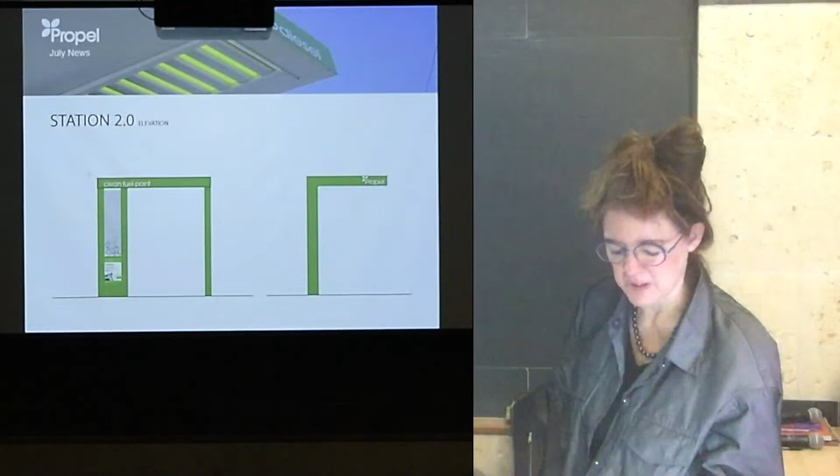Oh, design, clients, economics - so many of these journeys are about this piece. So while we won a big, nice award for that project, we did not get it built.

The next project, though, we did get from that project, and it was the Biodiesel Station, only it was funded now by Global Capital. We thought we had it made. Great, so we built this very elegant little element. We rebranded the whole Biodiesel Station for Propel.

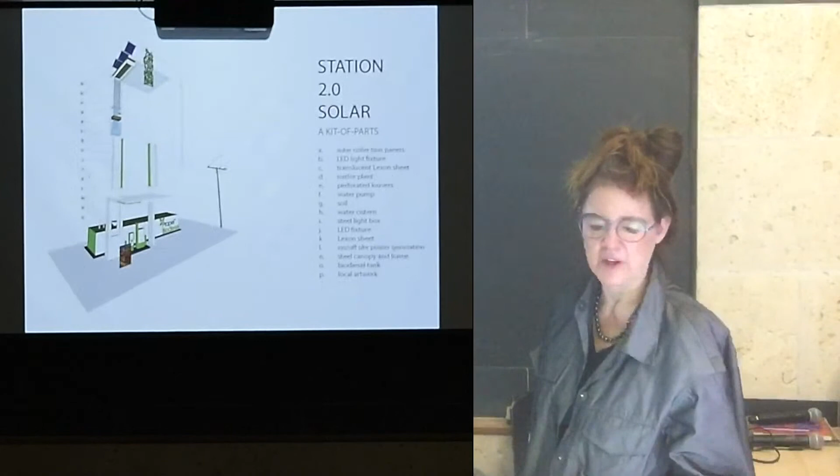This is July of 2007. We get this wonderful kit of parts. We have these biodiesel stations in the Pacific Northwest where we have water to deal with, and we have biodiesel stations in places like Austin, Sacramento, and Southern California that have solar to deal with.

We're still collecting the water. We've got all the pieces, and yes, a few of them got built. One got built in South Lake Union. We're creating the little landscape of sunflowers, because that's where the oil came from. That's where it's been upgraded with a little water filter in there. A lovely little water louver mock-up.

Fabulous little piece. It's now destroyed because of Global Capital as well, because South Lake Union is all taken up. But our plan was to roll these out with some kind of royalty system, down through Sacramento, all the way up and down the coast of California, Oregon, and Washington.

Again, the royalties got shifted. We didn't sign our contracts correctly. They went down to Sacramento, and another architect took them over, changed the whole branding concept, and we built this one. We were very happy about it, and yes, we won another award for it, but it stayed as a one-off, a single prototype that didn't have the power or impact we thought.

And then biodiesel's profile changed in the sustainability environmental movement anyway, and we were kind of happy we hadn't built 200 of them in the end.

The third waste to energy project, though, we said, let's take this into our own hands. So my husband and I, who's not an architect, bought this piece of land as an auction item from WashDOT, the Washington Department of Transportation. They were building this huge, lovely tunnel over to the tech companies on the east side of Seattle. And this little tiny site, 3,000 square feet, just a leftover thing, a pittance, and we were waiting to work on it. So first we thought, well, let's do something with food in the right-of-way. There's a Thurgood Marshall Elementary School right across the street that has hundreds and hundreds of elementary school kids, one of the biggest free lunch zones, elementary schools in the city. My daughter was going there.

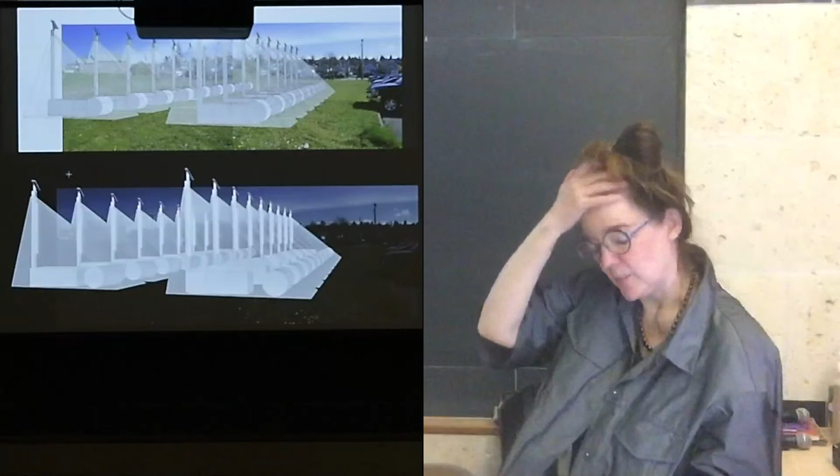Right below my daughter's foot, 6 inches below, is asphalt. So we said, hey, we can't put these greenhouses on there, so we have to build something that's above ground. So we built this little tiny, super low cost, $500 now, not $15,000, $500 per piece, all found little tiny water sheds and soil bags and a little bit of a solar operated temperature sensing and pump for the water to come in. And we had this great plan.

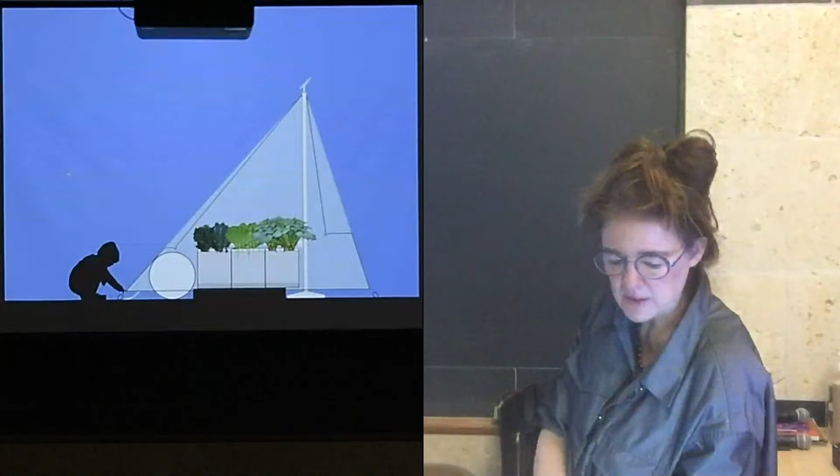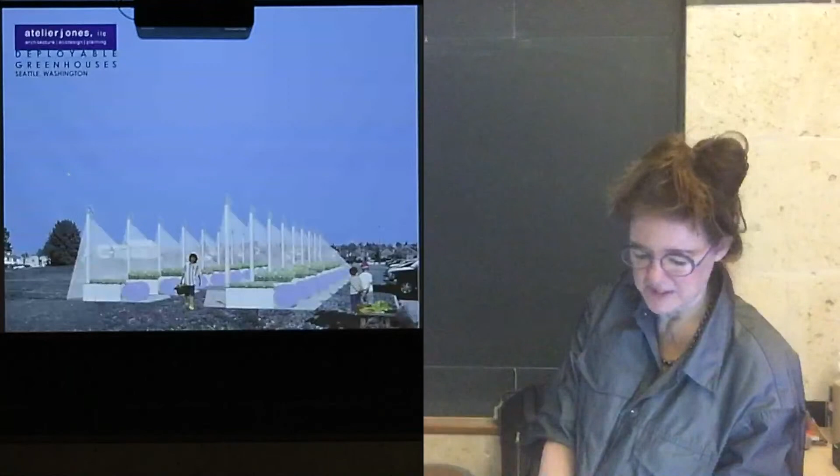We pitched it to the school. We pitched it to a Kickstarter site, and we raised $990. And 500 of that was from my mother, which was very nice of her. But the plan stayed as an idea, and the plan won a nice design award, but it stayed on the shelf, and the land still stayed the way it was.

The next zone, though, we went to Starbucks. Starbucks came to us. We don't quite know how. They said, listen, we've got this parking garage. This is the roof of the parking garage, and it's right under Howard Schultz's office. That's the city of Seattle in the background, looks over the water. It's an acre. It's an entire acre. It's been sitting there. It's a wasted site, 43,000 square feet. Let's build something here that can be fabulous for people who work for Howard.

So we went to the Office of Sustainability and Environment. We said, hey, listen, you're looking for a green roof initiative, a demonstration site. Boy, do we have a demonstration site, run by Starbucks, headquarters, on the top of this roof. It's an acre. We can hold stormwater, capture that stormwater, reduce the water runoff, which we have great issues with in Seattle, and then create a green roof for people to use.

We talked to the city of Seattle. We got all the assembly issues, the code issues massively done, put together this lovely presentation of how the green would be held up at the top, the water would be held in a cistern, come off as a runoff down to a decorative cistern down at the green street below, and the mermaid would be surrounded by green up on the top of this roof.

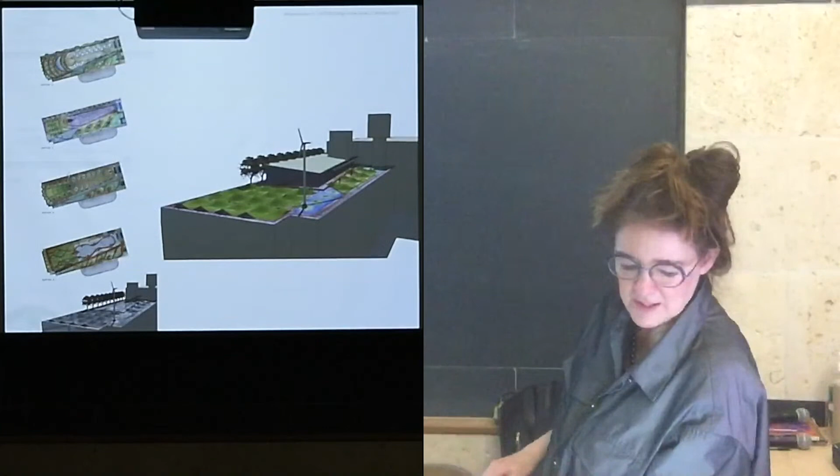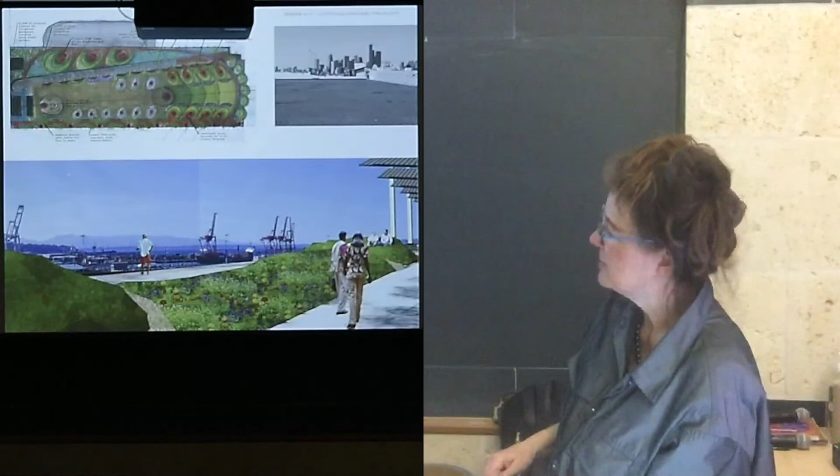Lovely pastel drawings. We were going to have Howard out there. He had his speaking spot. We were going to have solar, potentially a building up there, a lot of wind to have this all be powered, and places for people, for the 3,000 employees at Starbucks headquarters who were working at the building at the time, from waste to energy, looking out over the bay.

Built these beautiful models, and then guess what? We got it priced. This scheme was $6.5 million. Seems like a pretty good deal if you're Howard Schultz. Not. The next scheme down, with just less of the solar, less of the wind, less of the paved structure, was $4.5 million. If we just wanted to do sedums over the entire roof, it was going to be $1.5 million. Howard said no, to all three of them.

He had his investors in New York. He was concerned about them. They didn't want having some frivolous Seattle thing, a green roof on top of a parking garage. Didn't look good for the New York investors. So that project went into the drawer as well.

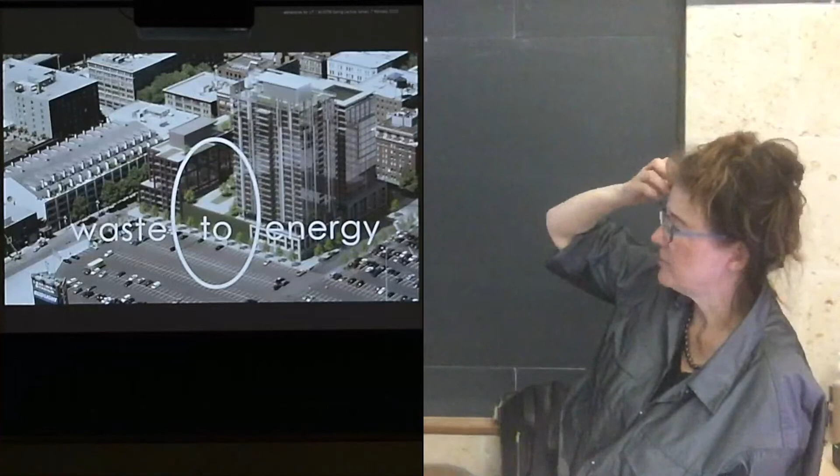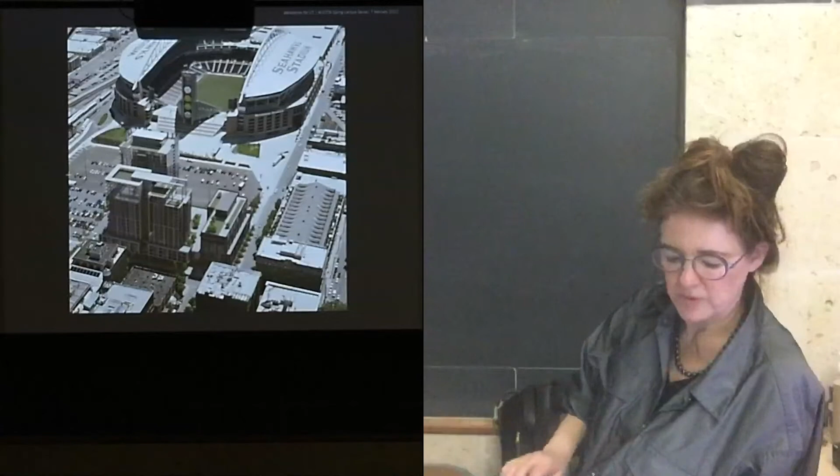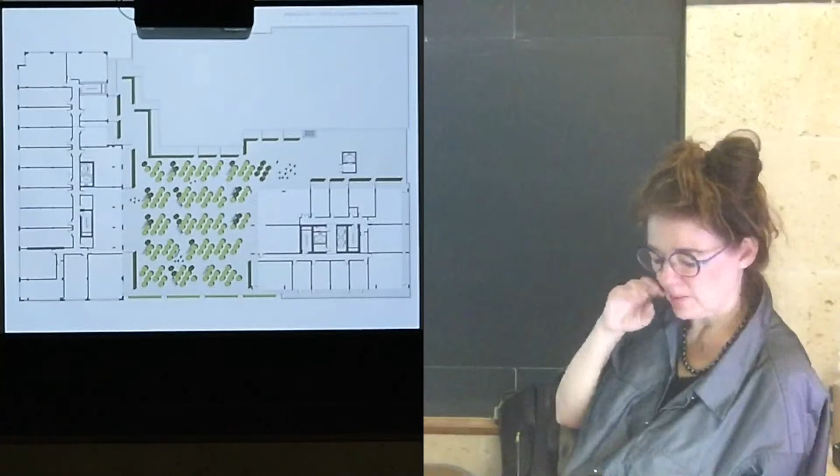The next project we looked at was a series of greenhouses for a friend of mine who had been a great partner from Daniel's development, Kevin Daniels, a very good friend of mine. He was building these high-rises on a parking lot, a wasted site, across from the Seahawks Stadium, which was a fabulous project for the entire city. He had been granted an agreement with the city of Seattle to build these high-rises plus the block next door, and he had this little tiny space on top of the podium, on top of the parking garage, ready and waiting for green. So we came to him and said, you want to put in a restaurant, a high-end organics restaurant on the lower floor, and we want to put in greenhouses to grow that food on top.

Of course, we had to worry about sun shading for all of the high-rises. It was facing south, well positioned there. We worked with landscape architects and planting people to come up with a planting plan that would work for agricultural food on top of this parking garage for different seasons, in the winter, summer, fall, all through the menus for the restaurant all year.

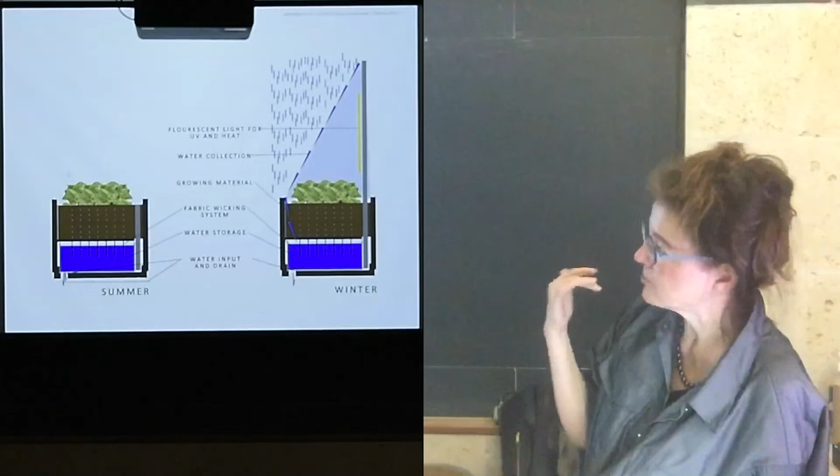Little tiny details regarding the beauty of these spaces, capturing the water, capturing the light, heating it with the light source on the interior, growing the food, and then detailing it all out, and again, getting it priced out. And guess what? You already know the answer.

Kevin said no, cost too much, can't do it. Then he said, but no problem, because I've got this wall that I have to do, and I've been given $1 million by the county to develop this wall, this vertical wall this time, on the same side of this site.

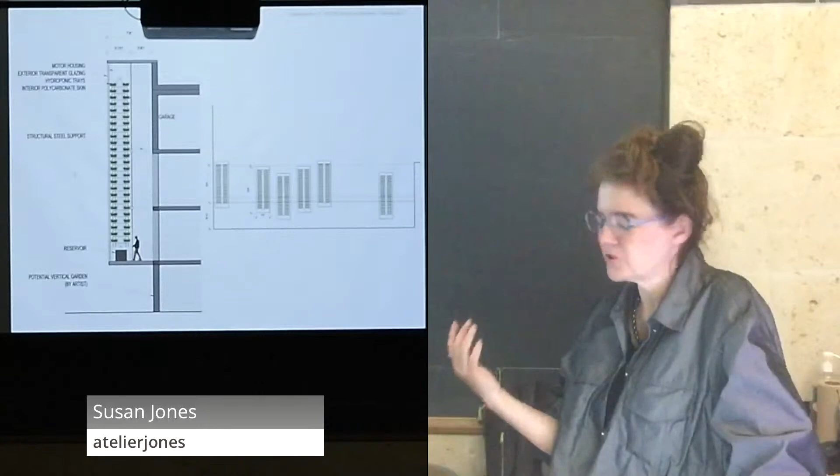Awesome, Kevin, can't wait. So this time I taught a studio at the University of Washington on greenhouses, on hydroponic greenhouses. This is in 2010. We learned about all the different elements of the hydroponic trays and the ebb and flow system, this lovely system called the VertiCrop, which is like a dry cleaning rack, where you can move all of the plants around, and they get equal access to light, using much less nutrients, much less water.

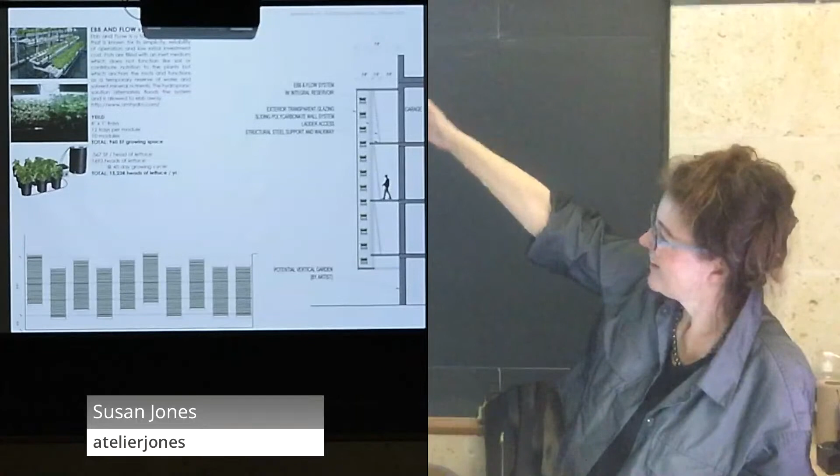And the beauty of it was that all of these systems could go on the outside of the garage, screening the garage from the site, from the Seahawks fans getting out of their game every day, moving up and down. You could use the maintenance as it was going up and down, and it created a very simple, lovely diagram on the exterior of this parking garage.

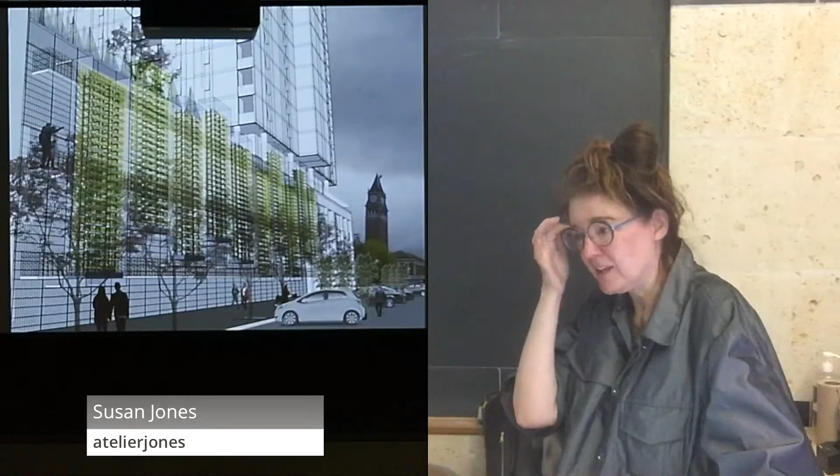Well, I don't have to tell you the answer to this one, but it was not only about cost. It was also about maintenance, because you had to have somebody to manage this thing, and it got more and more complex. These new systems that we were devising were pushing the boundaries of code, pushing the boundaries of risk and cost for our developers and owners, but they were also pushing the boundaries of operations and management. We were pushing more and more of these areas that made it almost impossible to build one of these few things.

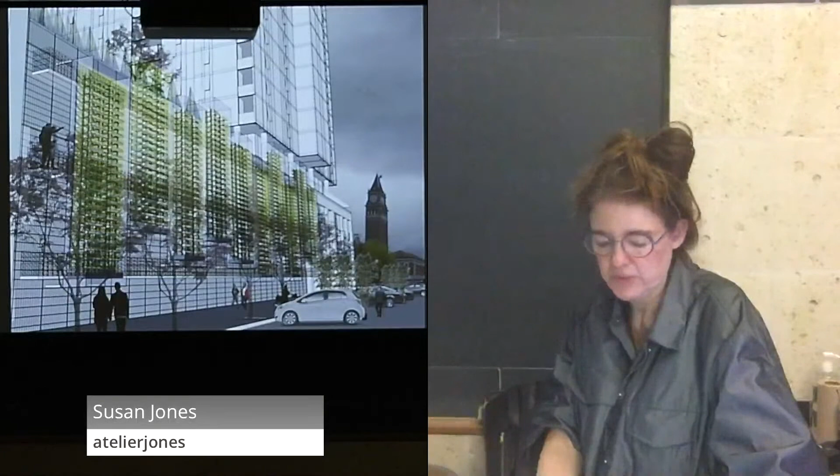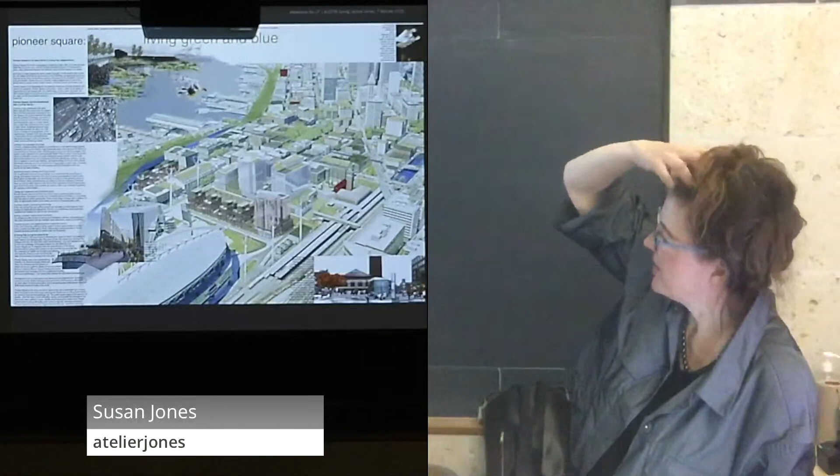We tried one more time, entering a competition for Jason McLennan on the Living Future, to capture all of these ideas. One of our big notions was to green all of Pioneer Square, where that lovely hydroponic greenhouse would have been, to add stormwater retention areas, to clean up the waterfront, to take down the highways, to capture the water in the underground areas under Pioneer Square, to clean it, to use it as energy through microturbines, put in green roofs, etc. In 2011, we won, yes, another lovely award.

A lovely design award. It was around this time, though, that we were beginning to reconsider our strategy. As architects, offering up design because we were offering it out of our passion, while also not being paid for all of those projects, almost all of them anyway, offering up that level of passion was probably a strategy that was not going to be sustaining in the long run.

And at the same time, there were 140 acres coming into my family's management from my grandfather, who had bought it in the 1960s. It had been clear cut, and he'd been growing these trees. There was a sense of discernment that the deeper I go into my own personal resources and use those resources for what they are, whatever those may be, and it's not just financial, it's a collection of family memories, history, legacy that all of us have, every single person in this room has.

The deeper you go into that and use those resources, the more powerful that can become. That level of discernment was a long process, and it didn't happen overnight. I wouldn't even have been able to say that it was happening until now, when I look back 10 years.

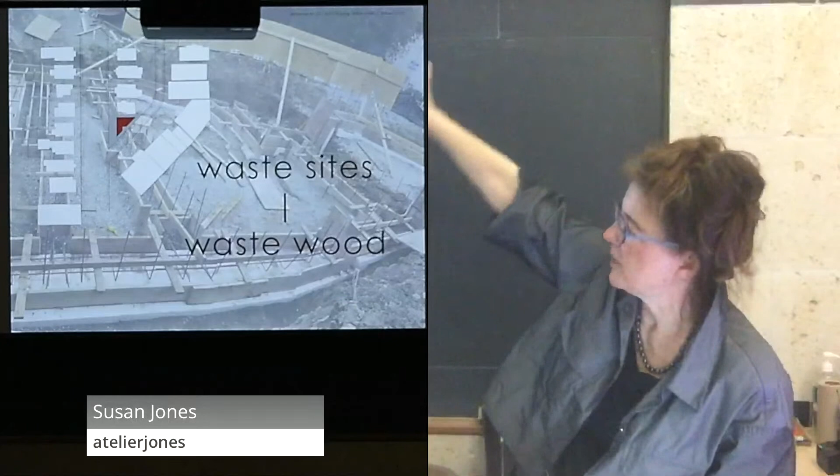We have the opportunity to buy a tiny site that's completely wasted, a triangular site in the middle of Madison Park. It's a leftover site — you can see it there. The diagonality of Madison comes down; it's kind of our Broadway of Seattle. And it's this leftover little triangular site, about 2,000 square feet.

The site itself — we said we can build. My kids have been in this 1,000 square foot condo for 10 years, and they were getting bigger and bigger, and we had no room for them. So we decided to build a house, and we were lucky enough and privileged enough to be able to do that. But the kind of house it was going to be at this point was very different than the kind of house I would have built 2 or 3 years before.

Because at this point, I knew I wanted it to be a demonstration house. I knew I had to put the resources together — professional, personal, and financial. I had to begin to take a huge risk and make a statement with design, and to do something that had not been done. Because all of the other projects I'd been trying to do had also not been done, but everybody was too scared to do them, except for somehow me.

Now, mass timber is not new. Uli's looking at me like, Susan, this is not new, of course. Germany, Austria — it's been around for 30 years. So in a way I felt like I had a free pass, right? Because the technology was tried and true. It just wasn't done in America.

There were about 2 buildings in Canada, both designed by Michael Green at that time, and that was about it. As far as I know, there were maybe 2 or 3 houses in New York that nobody could see because they were very private — there were NDAs associated with them. I didn't even know about them at the time. There was one house I knew had been built with mass timber, built by, I think, the Tennessee State football coach, and it looked like an Italian Renaissance villa. All the mass timber was completely closed up.

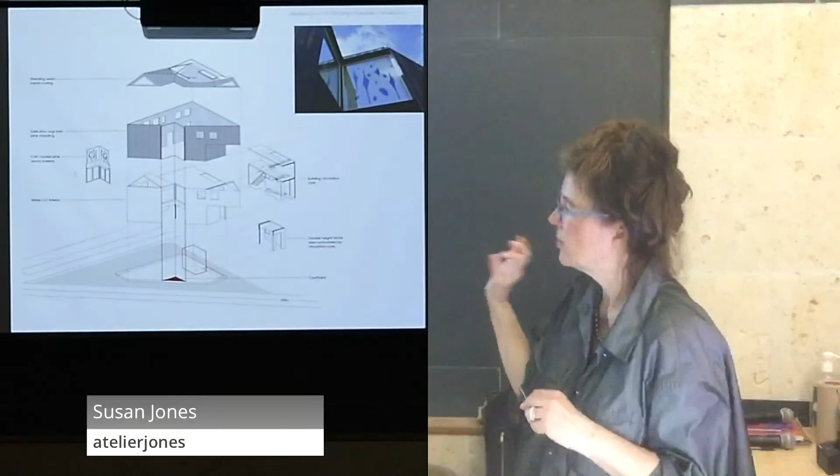We have a black shell of shou sugi ban, the Japanese burned wood, which we got pre-finished from Montana, Douglas fir 1x4s. The blackness surrounds as a hard shell the softness of the interior of the mass timber inside. You only see it a little bit at that one cutout where the courtyard happens, and it's kind of bearing its breast to open the beauty of the wood up there.

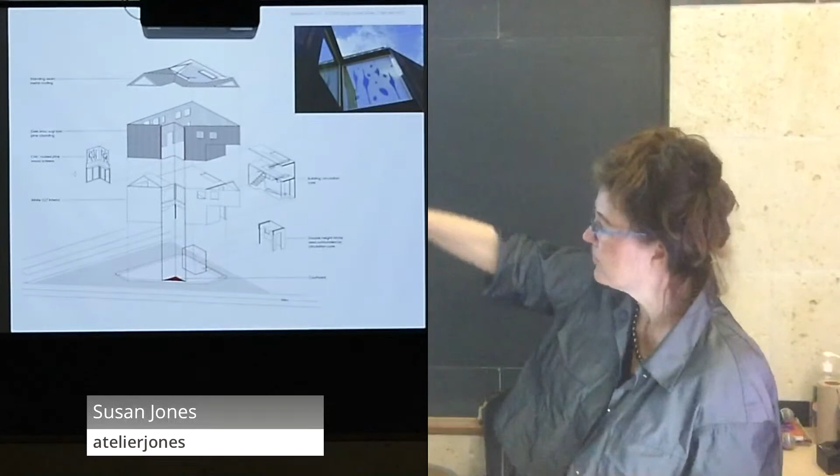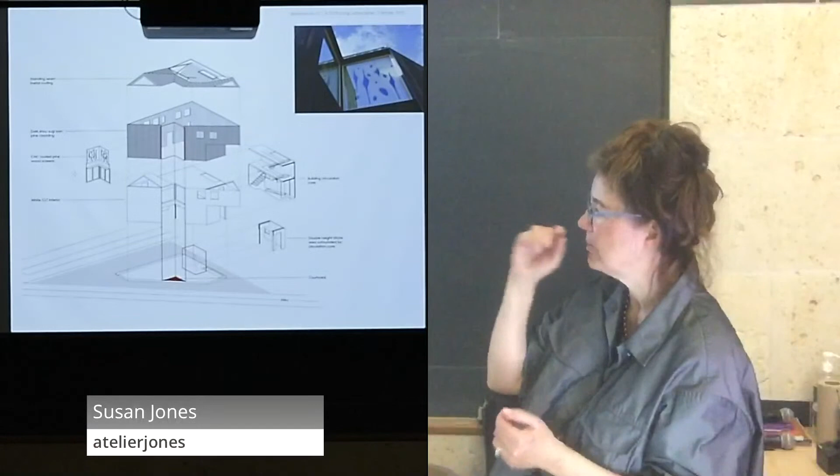We had a lot of fun with the CNC modeling, as you can see there. There's a core in the center of the house that carries almost all of the services, the basement, the HRVs, the ERVs, the heating, and the kitchen and bathroom above, as a vertical shaft with the staircase around it, and there's a roof deck on top, which is a simple standing seam, very vernacular for the area.

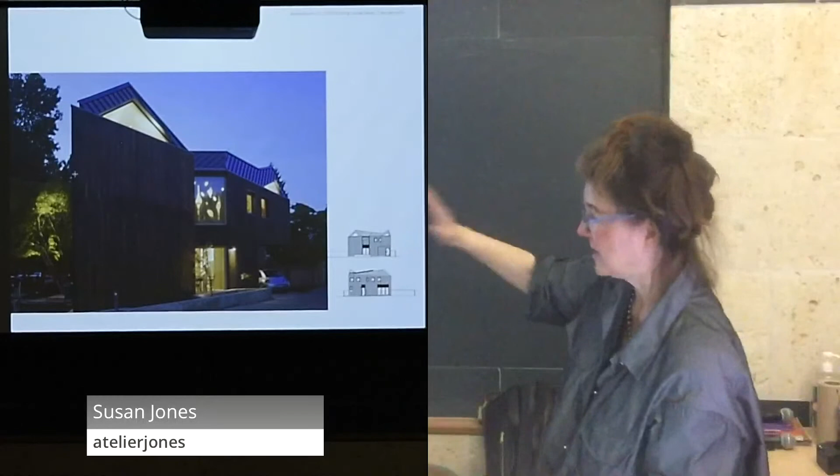This is from the alley. So much of the siting of this house is based on the fact that there's a very thorough, robust, dirty and active alley with garbage trucks going up and down, delivery trucks, semis coming through, and parking lots across the street.

We both wanted to wall that off, as well as open up to the light, because it's also the south and the west. So we kept the horizontal views very screened, and then we added a fence down at the bottom to screen in this little courtyard.

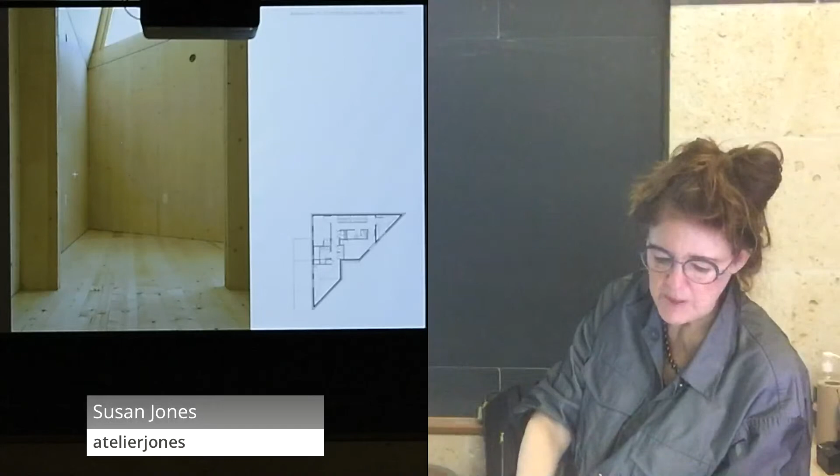On the inside is the pure blonde wood of the spruce, the pine, and the fir that are brought down from Canada. At the time, there was only one manufacturer of mass timber, CLT, in the entire West Coast, one west of the Mississippi, and it was up in Canada, Structurlam.

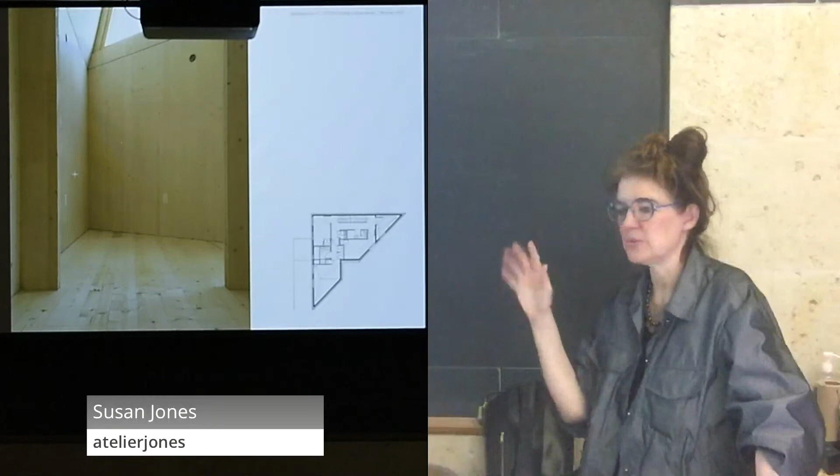Nordic Lam was on the east side, up in northern Quebec, but there were only 2 manufacturers in all of North America. We convinced Structurlam to give us a price for this that we could afford, and 67 panels arrived on site on a dark day in December, which was not at all like your dark day in January last week.

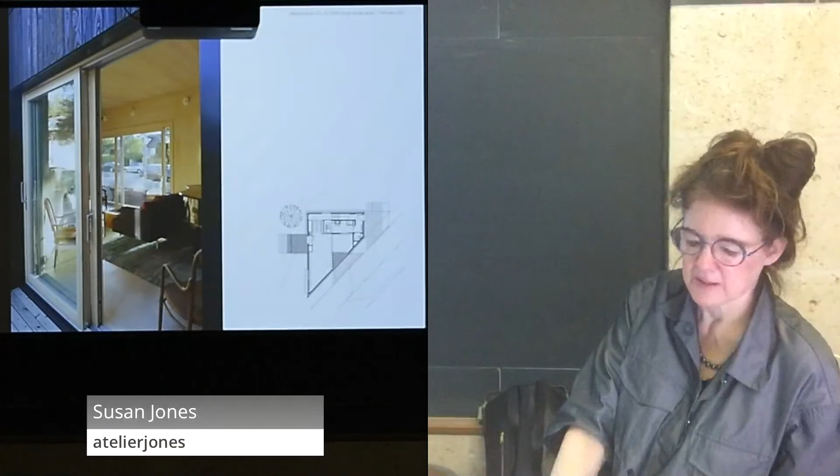Inside, the diagonality of the house means the views slice through diagonally through the spaces, from the courtyard to the living room, to the outside, the black, the dark, and the blonde, outside and inside. The little courtyard is growing in, added by a fence.

There's a huge fig tree that creates shade and respite from the alley. And inside, the CLT is exposed.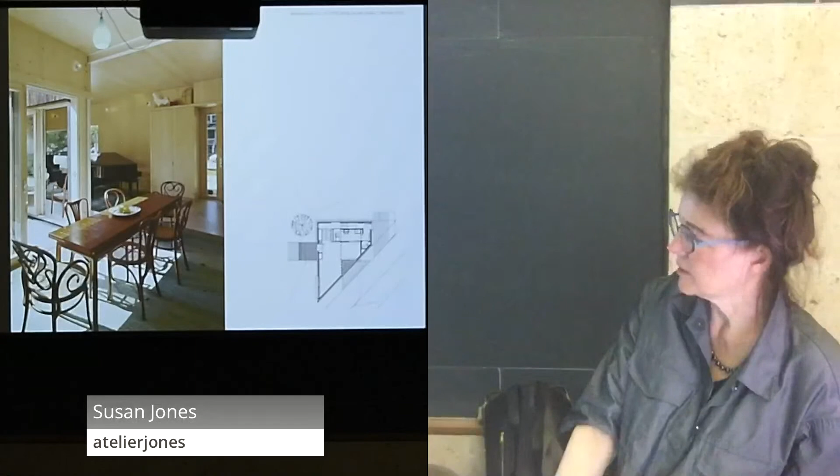We did what we would call a hybrid system. The glulam beams get a little heavy for me, so we are using, in most cases, as often as we can afford it, a very light painted steel. At the top is a beam and a couple of 4x4 steel columns, all white enameled.

The house steps down, sort of looking at Villa Müller from Loos, the space coming down the staircase into the main living area to reflect the sectionality of the site.

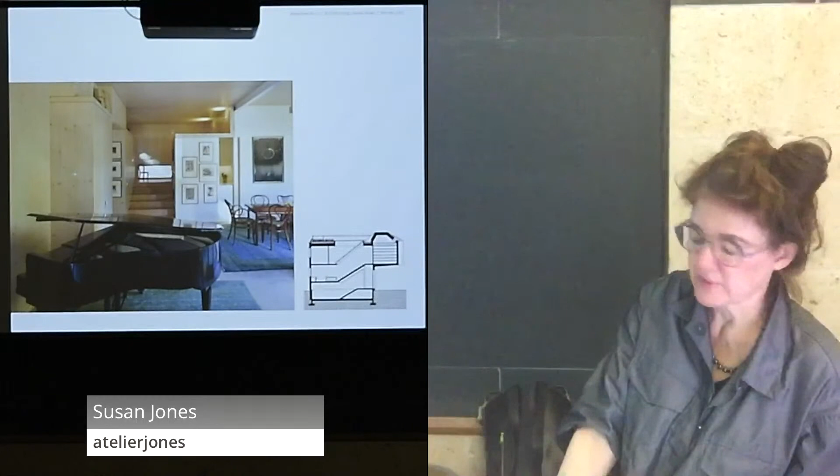As you move up and around the staircase, the core exposes the 3-ply, the 5-ply for the floor and ceiling slabs. The light is coming down from above, a rooftop skylight.

In my daughter's room, we had fun with the cutouts that you saw from the exterior, where we were riffing a little bit off the way pine knots look in cedar, in pine, when they're weathered, and this mysterious shape and quality of the grain as it weathers over time.

We had a lot of fun with the sections because we were able to do, I'll use my mouse now, 1 panel, 2 panels, a 3rd one behind this one, and a 4th one where this wall was, where this window is, all sitting on a little steel angle.

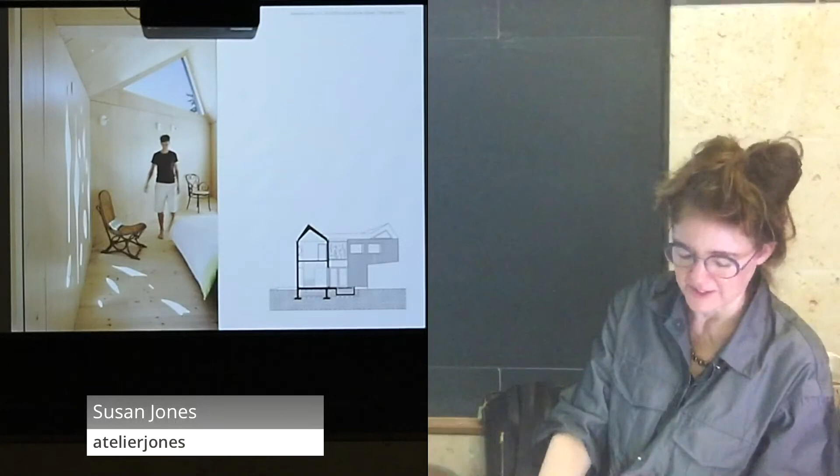We were able to put that space up in about 4 hours, as opposed to what would typically cause a contractor and a carpenter extreme anxiety. And everything fit perfectly, thanks to the CNC machines.

Walking up the stairs again, through the open window here, up to the roof deck, and the house from the outside again.

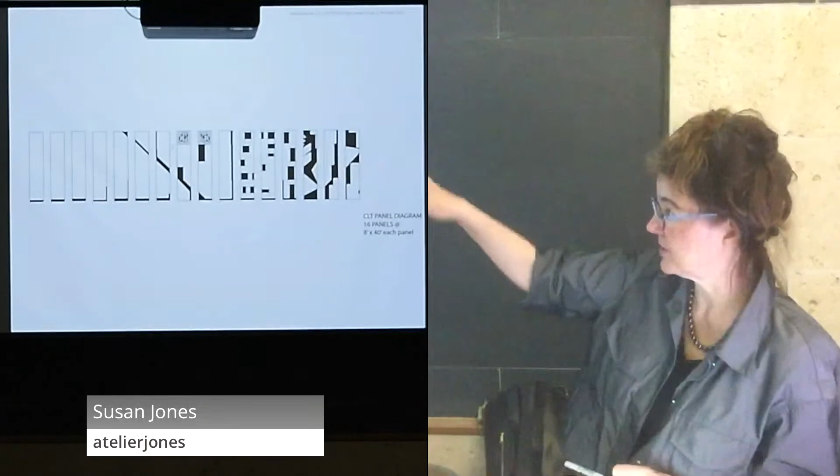What we didn't really understand was the whole prefabricated nature of the CLT. We did all the shop drawings ourselves. We had this artistic diagram, an architect's diagram of what we thought the panels would look like—16 panels, 67 pieces cut from those, with only a little bit of black waste in here.

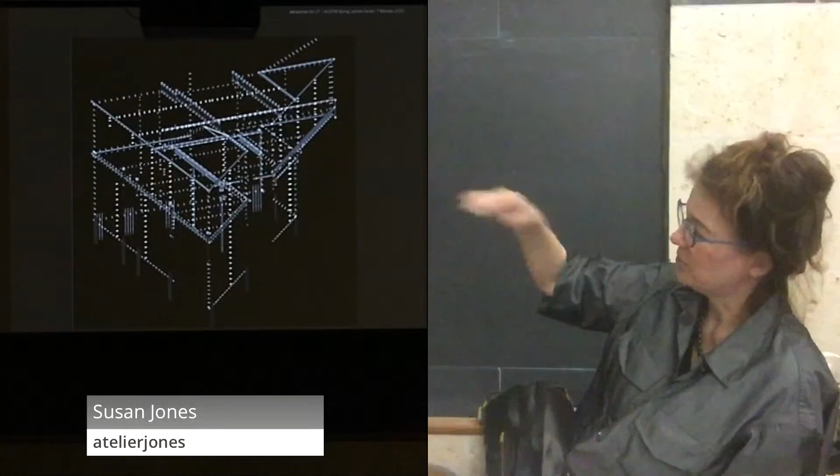In fact, what happened was a much more sophisticated project that was run by CADWorks, out of Structurlam's shop. They did a fabulous job for us. This beautiful drawing, I find it beautiful, is not done by us. It was done by Thor DeVoe, who is the CADWorks operator. It arrives on my computer one day.

Those are 857 connectors that are needed for this house, and there's 15 different kinds of connectors represented there. He thought it kind of looked cool, and I always love this drawing.

Inside, the wood was very bare. We sealed it. But one of the most amazing things was that you could count this wood.

You could count the panels, you could quantify it, you could add data to it. You knew how many 3-ply panels there were and how many board feet there were. You knew how many 5-ply panels and how many board feet there were. And you knew the total board foot, which then allowed you, through some complicated formulas that only really foresters and lumber people know, to figure out how many trees there were and how many acres it took to grow the trees to build this house, to build these 67 panels.

That quantification became very important when we're thinking about the carbon and the LCAs that we're working on.

But mostly inside this house, the wood was a constant and beautiful reminder of, yes, both the prefabrication quality of these finger joinings that joined those elements together, and also the way the light—in this case, the reflected water—shone upon it, a reminder of the power of the CNC machine and the ease of doing this little art project on the outside of my daughter's walls, and the glory of being able to work with angles that didn't really cause any issues.

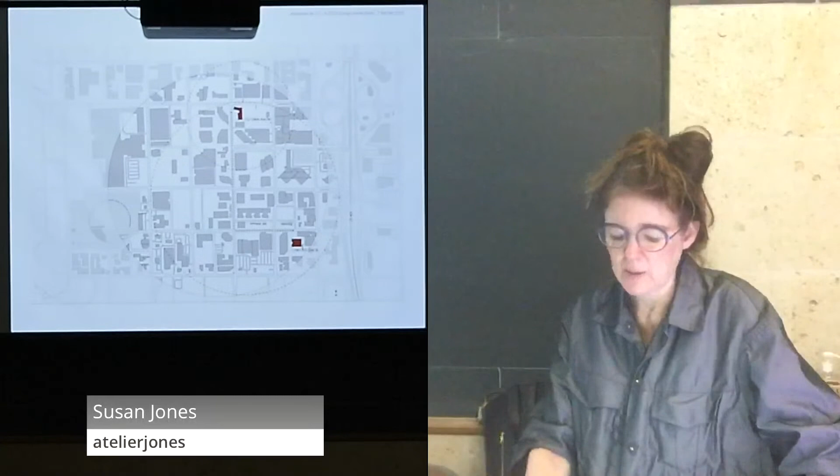The church wanted to move from Northeast 8th, here, from their old church over to here. They were doing some kind of real estate play with some Chinese developers that were going to build 3 high-rises on their site, and they had the money to buy this building and build their church. So they hired us to build an $8 million church on the outside of this.

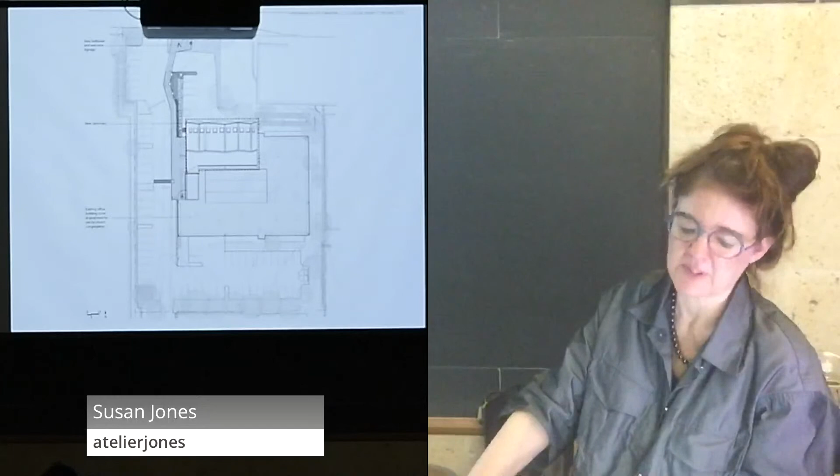We were very interested in using CLT from the very beginning. We wanted to use CLT as the structure for this new addition. Again, the contractor, the owner's rep was very negative about it—the risk was too much.

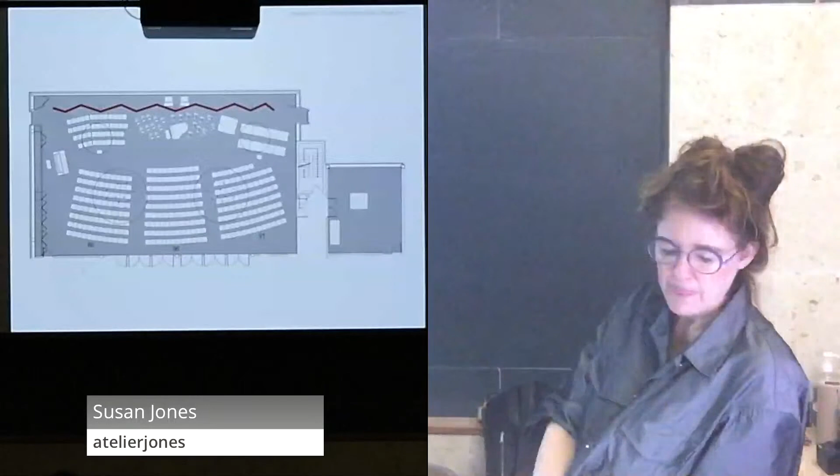So we ended up looking at this folded idea of a wall in the back of the church against the sanctuary, where the wall would become a series of 17 CLT panels running 8 feet by 40 feet high, and all of them could have their slightly different but same angularity that would reflect the light as it moved down through the site.

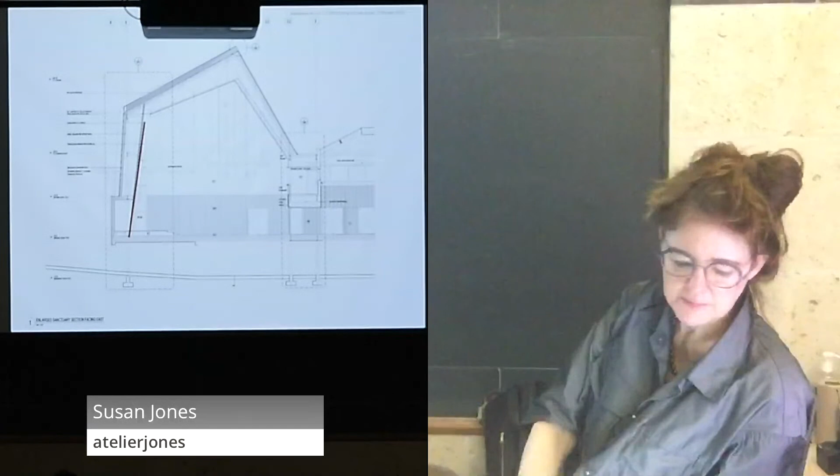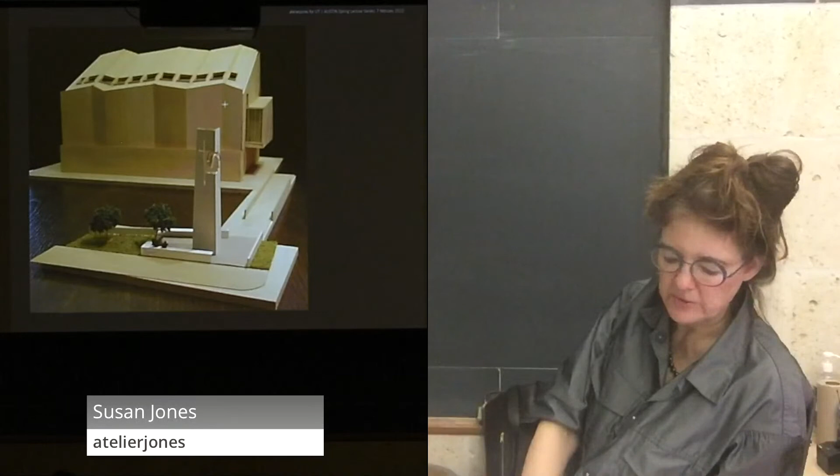They were supported by these steel columns, steel trusses in here. We made models after models to do light studies, to look at the sources of the indirect light. We built larger models, looking at the exterior. And the final built one, which you saw here, comes off of Northeast 2nd, the entry into the existing building, and then through the fellowship hall into the sanctuary.

Sanctuary closer up. When you emerge into the sanctuary, these 40-foot high panels are indirectly lit from the sides and the top, washing the light down in a very classical architectural sense. We looked a lot at Aalto's Imatra Church, with beautiful uses of light and secondary skins that reflect the qualities of light from outside to inside, especially in those northern climes, which we share in Bellevue in Seattle.

The light washes down differently at different times of the day and year, but it also washes down differently because each one of these panels has 4 different angles, and none of them are repeated. The angles at the bottom of this 40-foot panel, the angle at the top, the angles of the side are both in plan and in section, carved in a different way through the CNC modeling.

That took no extra time, other than the planning it took in the beginning, because you cut a 90 degree on these CNC machines, or you cut a 37.6, it doesn't matter to that machine. It's the same long 40-foot cut.

Space washes there. It's a 300-person sanctuary. And I'll just go through some of these experiences of light against the wood.

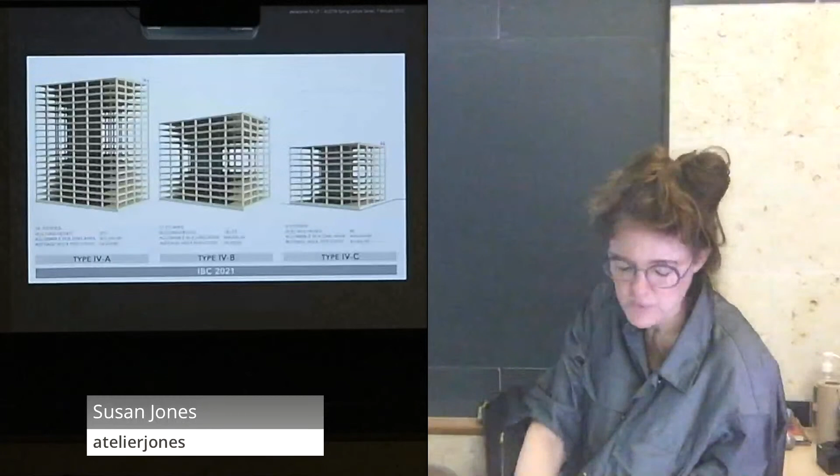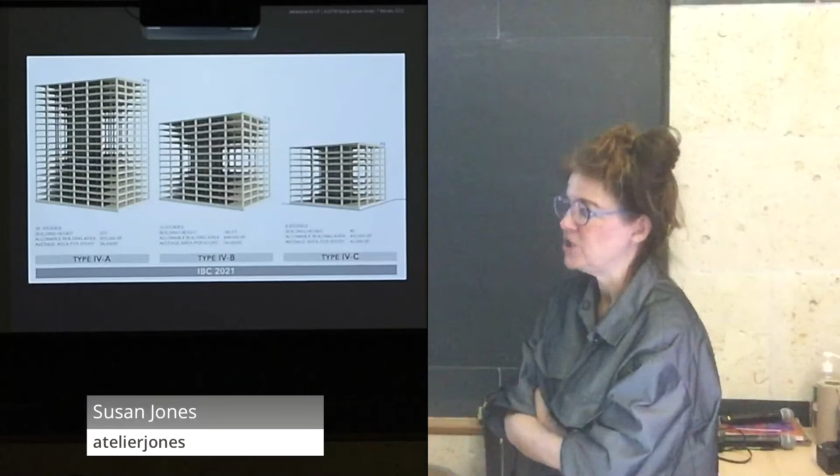And our task was not small. Our task was to create 3 new building types to complement the type 4HT: 9 stories, 12 stories, and 18 stories. We had to invent new ways of building. How would you build safely with these high rises? How would you structure them? How would you integrate services? And how would you protect, God forbid, the mass timber from burning down?

This is the type 4C building. You can see the gypsum topping slab, the openness of the ceilings and the walls, the columns, etc. But as we saw in the earlier one, type 4A gets completely built up.

However, we had to deal with the fire department, and these fire guys were really not fun. Going to New York City was one of the most terrifying experiences of my life, talking to the fire department there about what we were going to do to build wooden high-rises and how great it was going to be. Yeah, that went over really well.

So in order to get this through, we invented a series of protocols to do fire tests outside of DC at the Bureau of Alcohol, Tobacco, and Firearms. We built this building, designed the protocols to represent real life fires in America, as opposed to those European fires—those guys don't know how to burn down buildings over there.

You tell me, Sean McCain, how did that work? What's the real difference between European fires and American fires?

We tried to burn those buildings down five different times, let them run for four hours with no sprinklers, and we could not burn those buildings down. The impact of that was electric in the fire community, because no longer could they turn to data and claim these buildings are unsafe. The fires were contained within their compartments, they did not spread, and that opened the green light to real code testifying in front of the committee action hearings for the ICC in 2018.

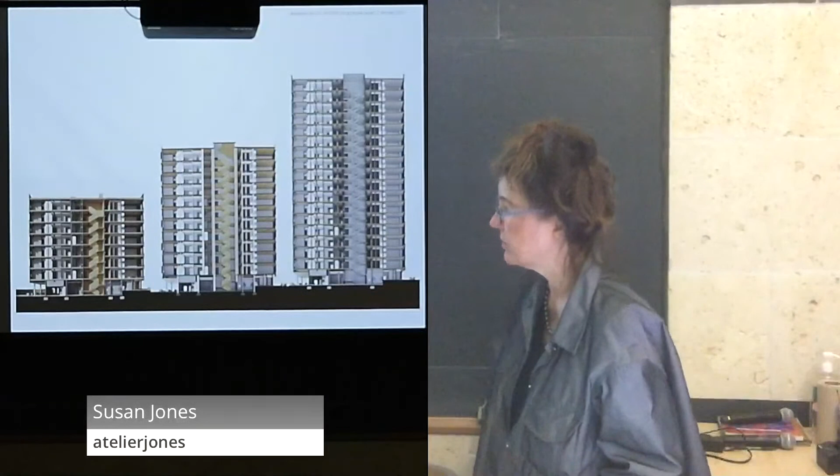And those codes did pass the committee, despite the assembled ammunition of the concrete industry, who did not go over lightly, nor did parts of the fire communities. The code community as a whole ended up voting for those codes, and in 2019 they became law to build these three different types of buildings: type 4C, type 4B, and type 4A.

I then needed to come back to test the LCA analyses.

I've been working with Kate Simonen, who you may know from the Carbon Leadership Forum at the University of Washington. She's an incredible life cycle scientist, working with University of Washington's Indroneil Ganguly, Maureen Puettmann, incredible people looking at mass timber, and we partnered with the Nature Conservancy to test and verify. Because we were using so much new data and new life cycle analysis data, and I'm not a life cycle scientist, we collaborated with them to make sure we were actually on the right path.

We ended up doing more fire tests in Sweden. In addition to the first five, we did another five last fall. Again, tried to burn that building down five times, never got to it. And then we created more code regulations to allow all of this ceiling to be open, even at the 12-story side buildings.

And it brought us to a very great, lovely place in our practice just a year ago, where we were able to focus and refocus our attention on what we could do to build out of this mass timber, out of this industry that we created.

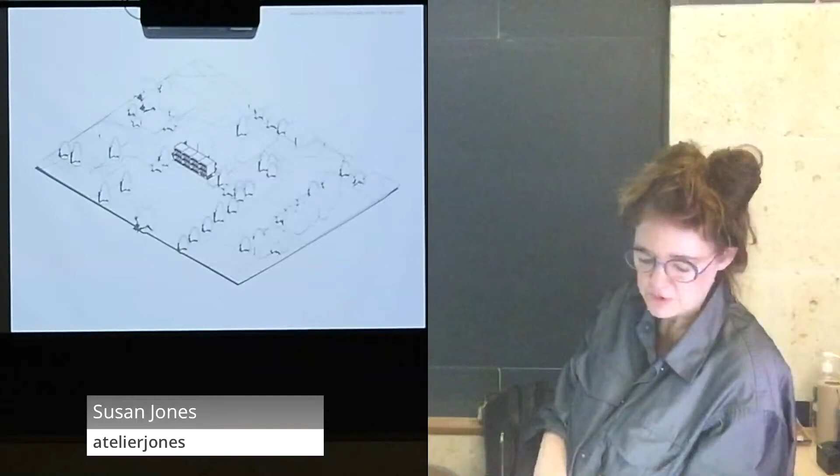The first little notion that we did was to take that little 3,000 square foot site in the Central District across from Thurgood Marshall Elementary School and build something out of mass timber this time.

We looked at some townhouses, we looked at some modular units, and we're now pulling a permit for a very small 5-unit building that would be a modular building, four different units, two-story units up on top, and a large single-family, three-story, three-bedroom unit down below.

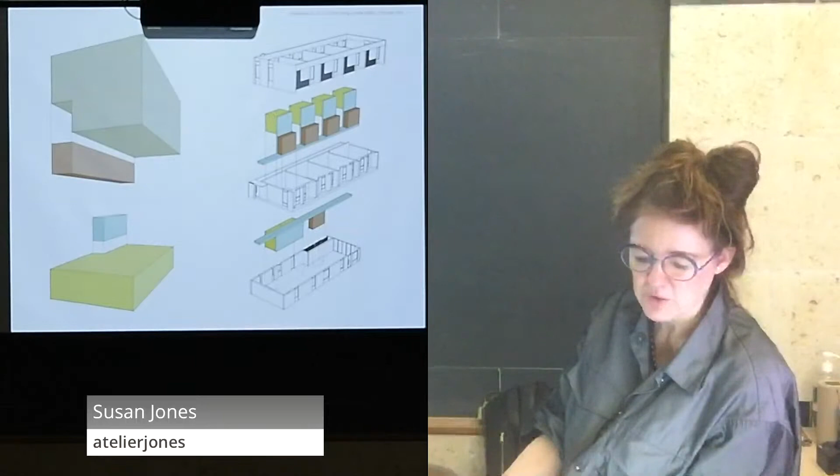The design of this building is a very flat concrete element, cantilevered over the top with two-story units and a back circulation area with a shaft going up and down. We're looking at prefabricated modular elements as opposed to prefabricated volumetric elements, and these will slip into the shafts—kitchens and baths—going vertically down the soffit into the street. A little bit of the layouts of the first, second, and third floor, and of course the CLT.

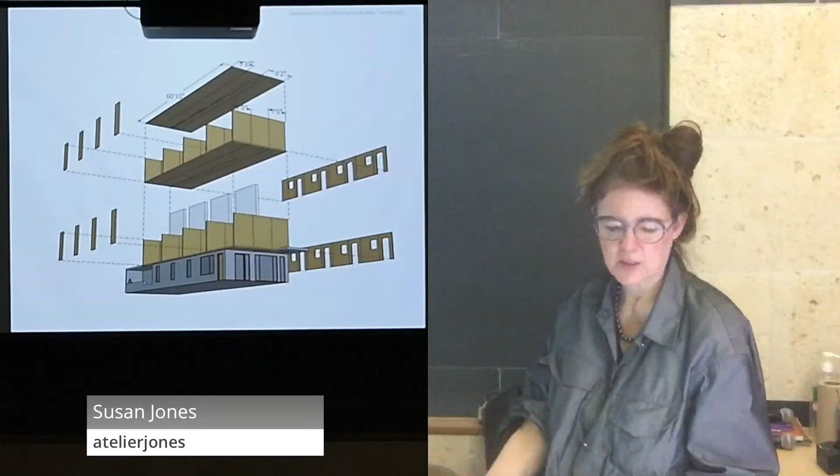This time using 60-foot long panels. This is a very simple type 5B building, using prefabricated elements for the exterior.

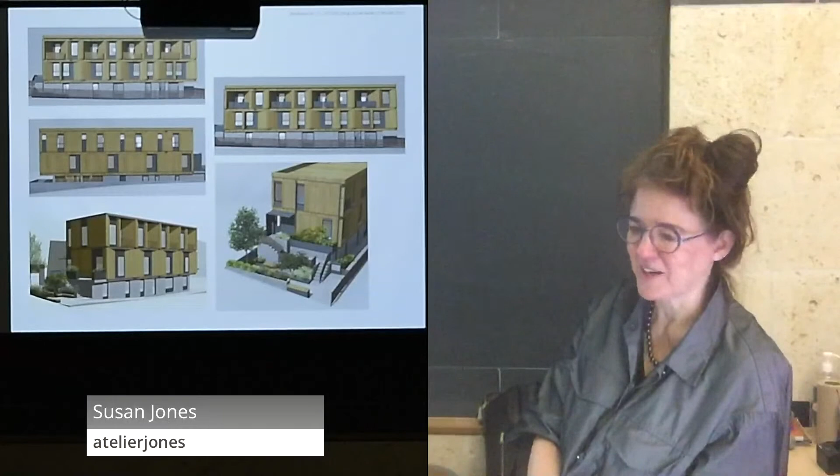Looking at this little project here, there's a myriad of designs. When you're developing something yourself, you have a lot more time to begin to have fun with different ideas. The building is going through building permit right now.

The last project I'm going to talk about is our Capitol Hill housing project, which is arguably one of the most significant projects for our firm, and one of the most significant ones in Washington. It'll be the tallest mass timber building in the state, and one of, if not the first, type 4C building to be built.

It's also on a parking lot. We love these waste sites, these infill sites in our cities. It's adjacent to this 1907 historic home designed and built by the Vaughan family, and it's owned currently by Capitol Hill Housing, Community Roots Housing, who is our client, and it serves an affordable housing market of 30% affordable income.

Our project will be serving workforce housing, designed between 60 and 120% of median income, which in Seattle is surprisingly high and includes a lot of architects.

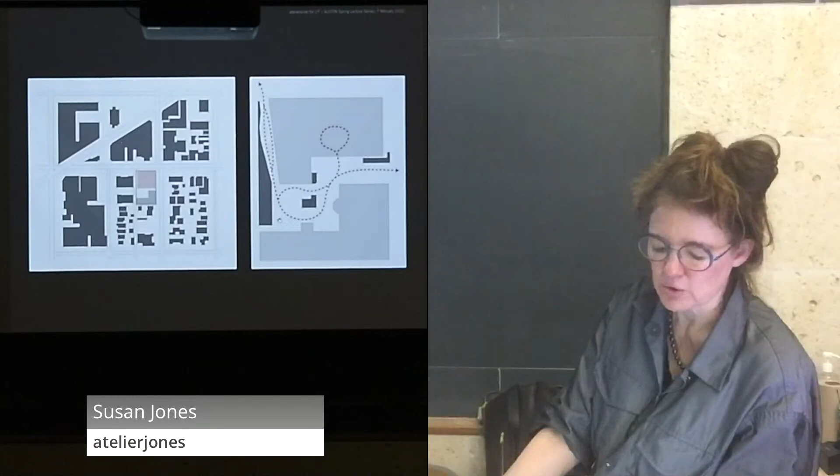Here's the diagram for this site: this is the existing building, and this is the parking lot. This is Madison Street slicing through the city, our house is on the other side of it, and this is Union Street. The existing building here, we're creating a little courtyard to try to get these two populations to mix and come together.

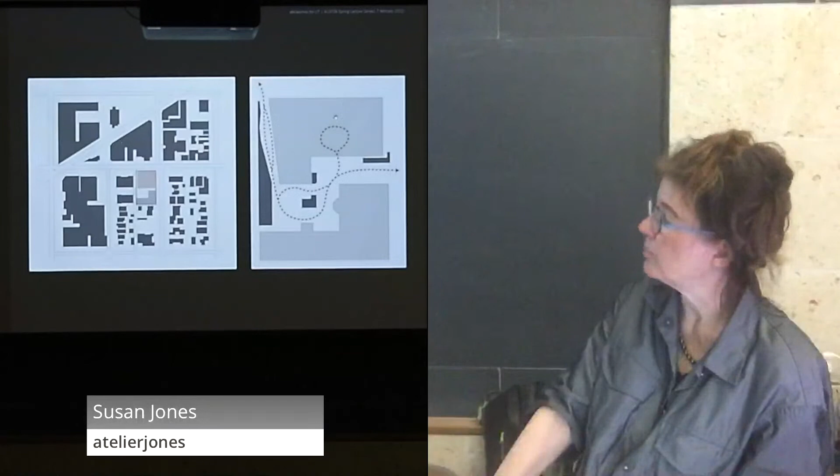There's a fair amount of defensiveness and concern about the two populations mixing, brought on by the residents themselves. There are deep and ingrained equity issues on this site that are felt very keenly by the residents. So while our project is owned by the same client that owns this building, there's a series of very careful interventions we're trying to make to bring these populations together in a way that feels secure and safe and aware for everybody.

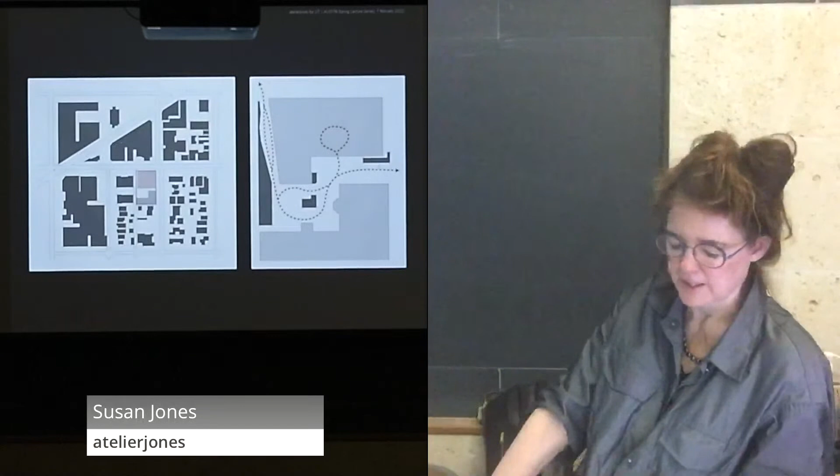This site is permeable, both off Union and off 14th side. It's a simple L-shaped building with small units averaging 400 square feet above. We have a series of stoops going out to Union Street and a long walkway off of Union Street, looking at some ground level units, and of course the big lobby going up into the project.

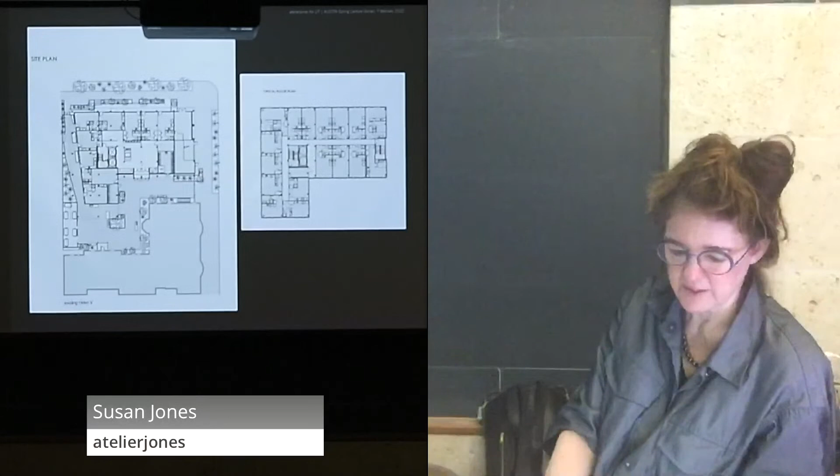The building also adds scale to the city—tremendous scale, up to 8 stories, as opposed to the 3-story surroundings. We have a couple of 5-over-1 buildings and one little 6-story building right here, but it brings it up to that Middle European contour of about 22 meters and 8 stories, and it's a type 4C building.

It's a very simple building with repetitive units, using the same CLT layout per floor, a little bit different, taking a single window and using it as a single element repeated in different ways as you move up and down the building, but quite a simple and humble building.

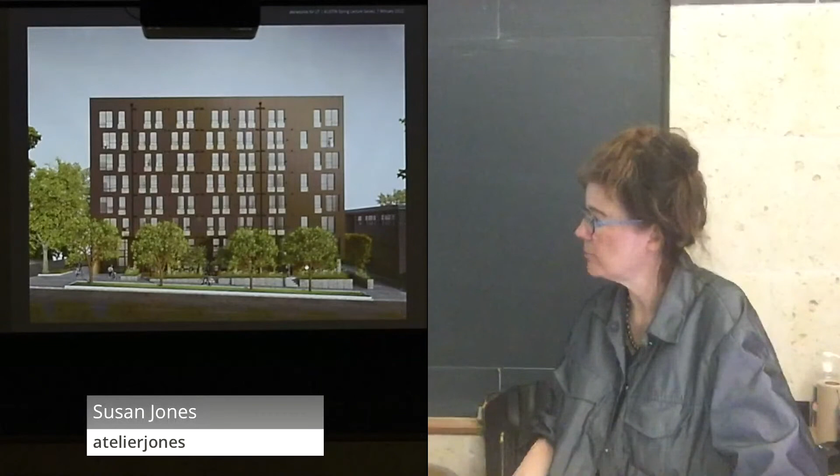Setting on a podium of mass timber this time, but clad in Nichiha, a fiber cement product made to look like wood, with a little bit of retail space here and a series of defensible space planters for these small stoops in the front, and then the alley entry off this side with the main entry off the back.

The alley entry there, and some shots of the courtyard as you move in.

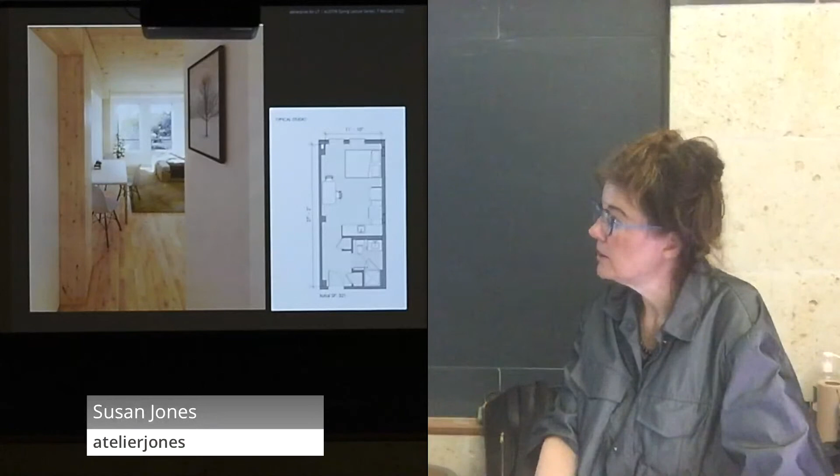And the interior space of one of the smallest units of all, a 321 square foot studio—small bathroom, small shower, small kitchen, bed, ideally a Murphy bed, with a couple of windows, all framed in mass timber ceilings, columns, and beams, looking out to the city of Seattle beyond, enveloped in natural wood—a small gift to these humble units, to the inhabitants of them.

The story of where the wood comes from is reflected in this mural on the exterior. All of the wood can be regrown in the United States in 37 minutes. This kind of new growth that happens in May for our Douglas fir trees is a stunning and beautiful addition to our forests around the second week of May.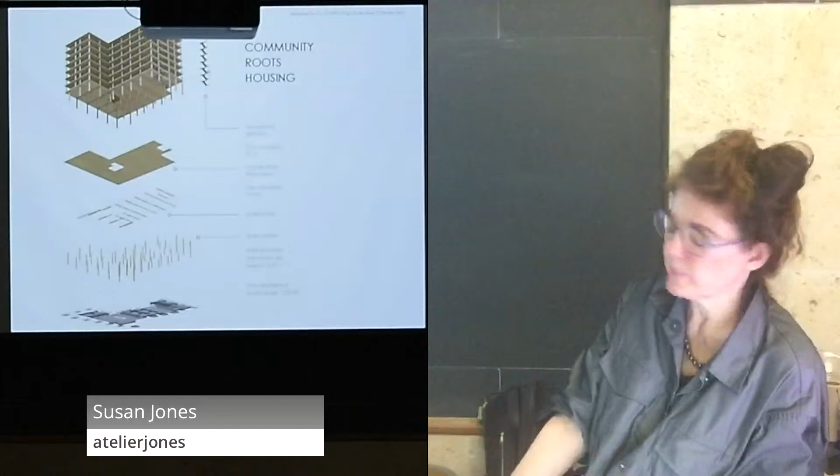We have no parking on this site. We have a little bit of concrete down here. This is all of the concrete in the building: the foundation and the walls, foundation and the grade beams, columns and beams, floor slabs of the CLT, and the mass plywood panel stairs going up. The wood greatly exceeds the amount of concrete, in addition to the gypsum topping on the floor slabs.

One of the most exciting things in our practice right now is this building is going to be starting construction in a month. We've been permitted by the City of Seattle. We have been permitted as of right, so all of the Type 4C codes are now active and able to be used by this project.

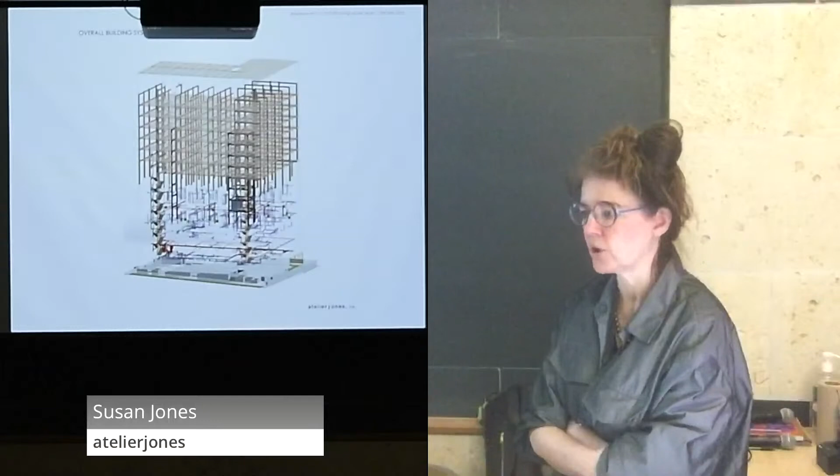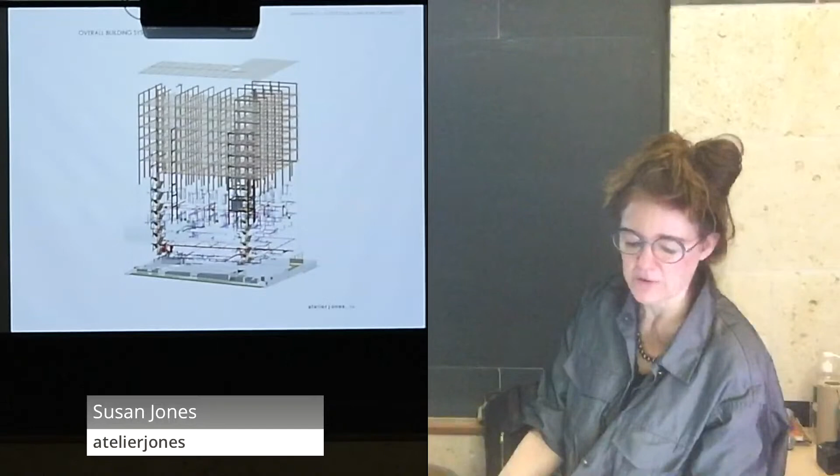We see this project as a replicable project where we can take this Revit model, which is straight off of my network on this computer, accessible by my computer. This is not an architect's drawing. This is an exploded axon of all of the live systems in the site, from the concrete at the bottom, all the fire life safety sprinklers, mechanical, plumbing, electrical conduit, the steel core, brace frames, reinforced frames, and then the glulam columns and beams and CLT slabs.

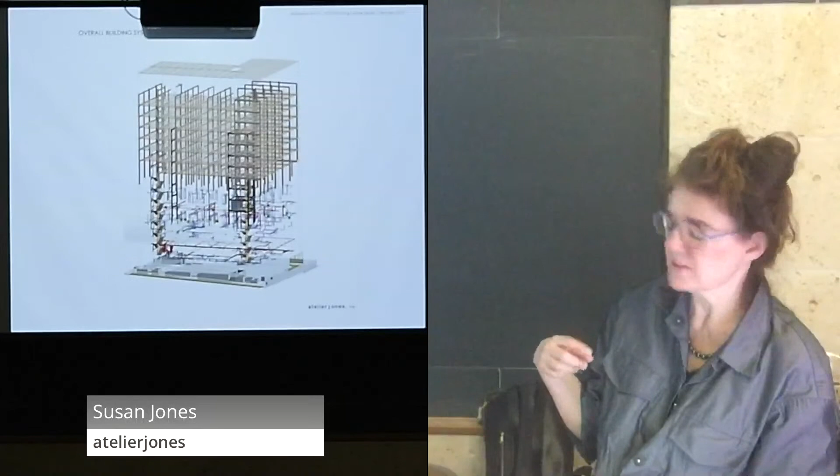This is a live Revit model which can be replicated. The simplicity of the plan, the simplicity of the structural elements makes this possible to replicate in multiple different ways.

One of the next things we're going to be doing as a firm is taking this as a design idea and replicating it, because the system on the exterior can go to market rate housing, this can go to high-end housing, this can even go to office, although it's difficult with the floor slab sizes. And the design on the exterior can be of any nature.

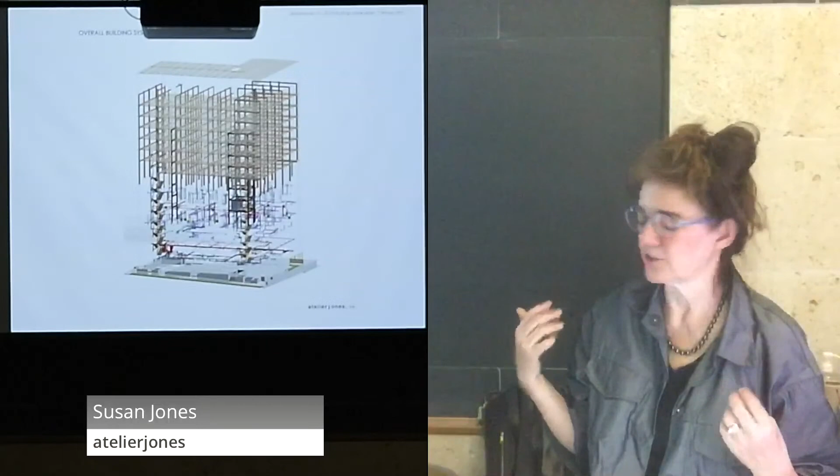And we'll be replicating this over the next few months to begin to demonstrate the disruptive power of this building that you've never seen before, not even in Europe really. This is an 8-story building.

This is the superstructure of this project with the MPP stairs, wood stairs going through on this very slim little concrete foundation and grade beams.

And the power of CLT has been disruptive, both for the AEC industry, but also for the forests. And it brings us back to the nature of why we are doing this as architects, and why we are building as architects, and why the challenges before us as a profession to deal with both levels of ecologies, from our built ecologies and our urban ecologies to the ecologies of our forest and the nature around us.

Thank you very much.

Susan, I don't know that we could do questions online, but since you're the guinea pig for getting all this stuff together. I can talk to them, right? Yeah. But why don't we start with questions in the room? Yeah, that would be a really ideal thing to do.

Thank you very much, that was a terrific lecture. Let's start with questions.

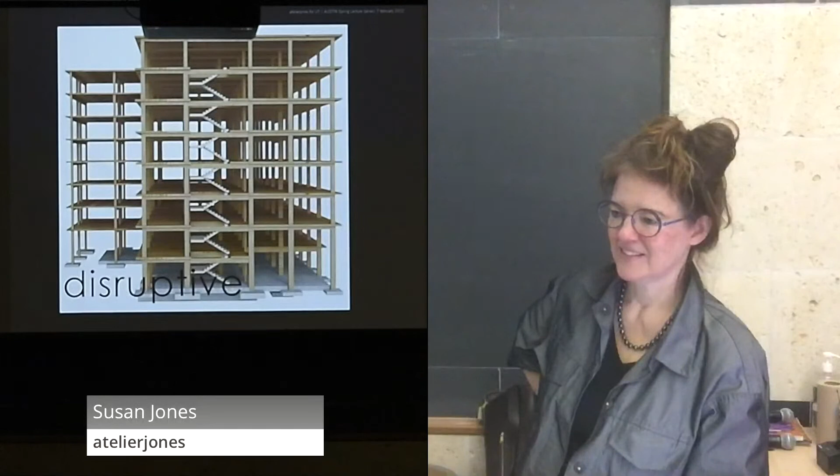So there comes in the idea with the waste wood, which I think you could completely recycle, the whole thing. So could you explain more about how actually now in the CLT we could integrate really recycling, like existing buildings and so on.

So many different levels to your question, Daniel. First of all, there's a predilection to think that mass timber is the entire building. The reason I show this is because it's obviously only one part of the building.

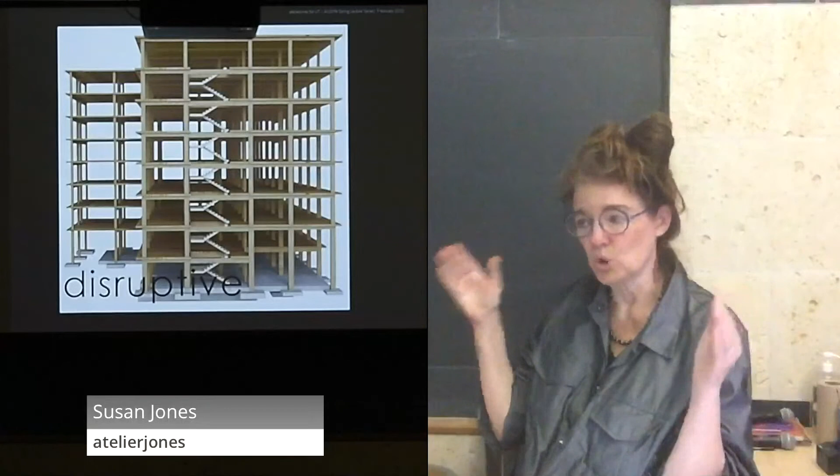There's a massive amount of building around it and on top of it that's not wood, not to mention the concrete foundation, which always has to be concrete because it's below grade. It's very tempting to think you just take the square footage of our buildings and that's the wood we need. The wood in this building is a fraction of the square footage of the buildings we're looking at. It's a common misconception, and you're a data guy so I won't doubt your math, but I'm calling it into question.

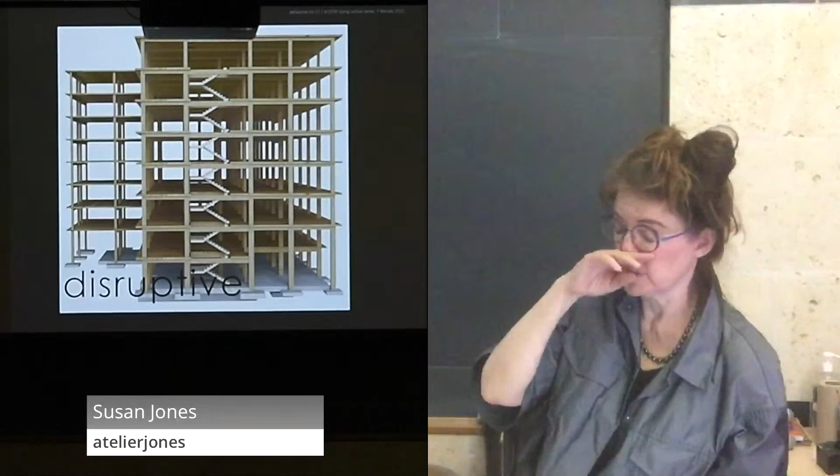But your question was also about how to reuse the wood. That is, I think, an area that we as an industry in the US and as academics could really contribute to greatly: the second use and design for disassembly. There's been a lot of work done on that through a series of USDA grants, but there's a tremendous amount of thought that could still be put into it.

The differences between this building and what you normally think of as a light wood frame building with 2x4s and 2x6s, like the houses we were talking about the other day—these buildings are mass timber pieces, which are big. So if you destroy this building, hopefully in no less than 100, a couple hundred years, you're going to have some very major pieces of wood which have all been protected by weather barriers and from climate issues. They're all well detailed by those big long screws that you can now screw out—you don't even need to hammer them, because they're not nails, they're screws.

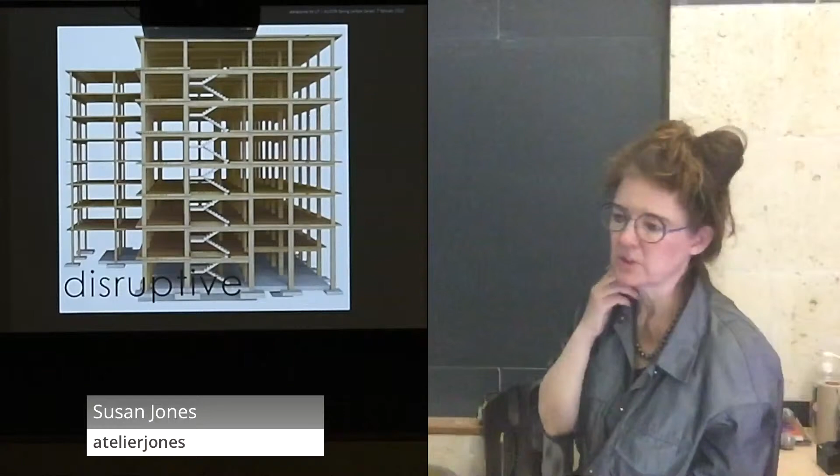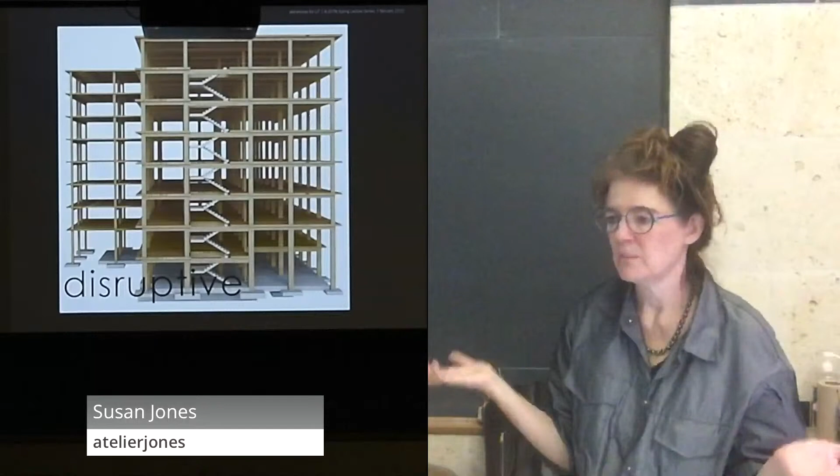So if you were pulling these pieces out and stacking them like big, huge, lovely 18 by 18 inch beams and columns, the challenge of using these pieces becomes completely different. Most of my career, I've watched my architectural peers pull out these big 18 by 18 pieces of wood and reuse them in beautiful restaurants and retail spaces—of course we all want to use them. But they're a limited supply chain, because the forests those trees came from are dead; we're not cutting them anymore, and they've already been used. So to use a 21st century product that can be revamped out of small waste wood, which was also your point, is a really valuable thing.

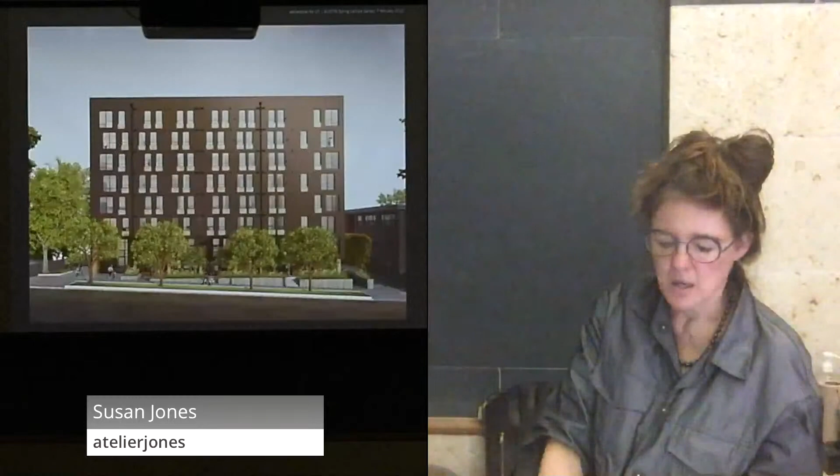Now, I don't have the math on this, but I do have a demand paper that was just published in December 2021, a month ago. There were three papers I was an author on regarding life cycle analyses comparing concrete versus mass timber buildings—I'm happy to send you these, Daniel. In that same journal, a special issue on mass timber for the journal Sustainability, there were two articles talking about the global demand for mass timber.

Should it take off in the way we all think it might? Both articles said, first of all, architects are building such a small amount of the total building area out there—we're substituting a relatively small amount of buildings regardless. But both were very clear there would be a very insignificant impact on our forests if the forests were managed carefully and sustainably, which they absolutely have to be to make this all work.

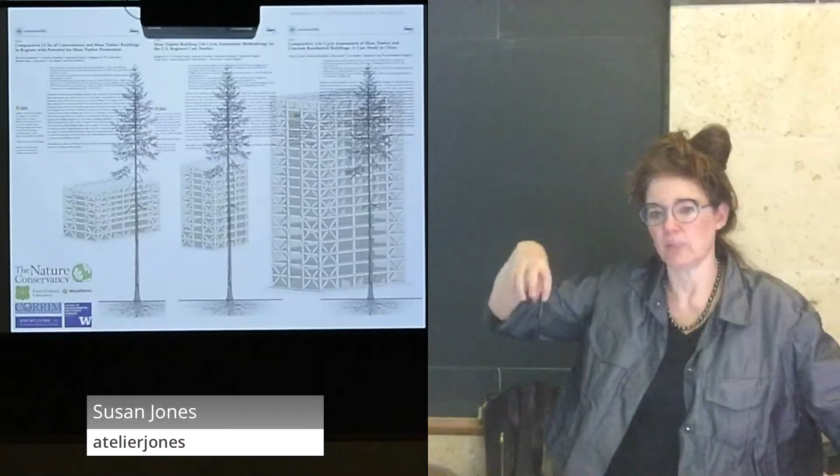Two of the projects we were working on were intended to be modular, planned modularly but not volumetrically brought in. This impact has rolled out and affected the construction industry because the power of modular and prefabrication is extremely compelling. If we can get it right—we all saw Katerra in Washington state go up and go down in this influx of huge amounts of global capital, trying to create the perfect 3-story, 4-story walk-up single-family house, and also mass timber multifamily areas.

But that multifamily project really wasn't a modular project. I think one of the greatest challenges we have is not designing it first, but implementing it the second, third, fourth, and fifth time, where you get those powers of scale.

I really want to be very encouraging to the modular prefabricated world. We've had 4 or 5 experiences where we need to be more aggressive about keeping the bespoke site and programmatic constraints extremely disciplined in order to bring the power of scale at modular to fruition in the end. So I'm very excited about smaller scale single-family developments for modular work, and I would love to talk to your friend on the YouTube video about it further.

We've had a lot of really fun projects—I didn't show two of them here, but they're currently on hold because of the challenge of replication on the site constraints. The mass timber part is a piece of cake.